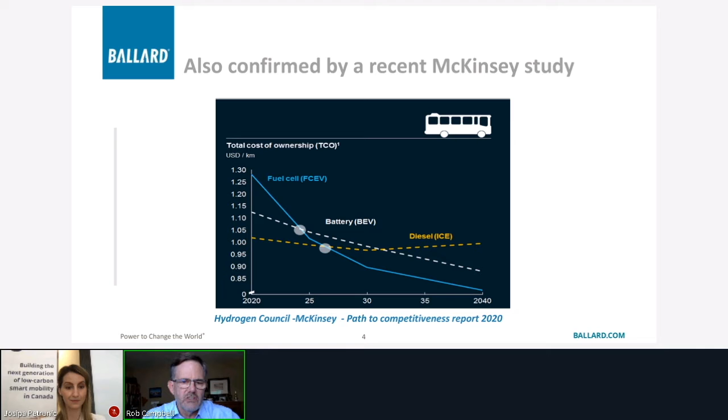But you may ask, how can this be the case? Well, this is all about the convergence of 6 key enabling factors that are making what we call the hydrogen economy truly transformative for our society going forward. So let's have a look at these factors. In brief, we have technology, the outcome of decades of work, as mentioned, with support from the Canadian government as well. And performance: millions of kilometers of road experience with feedback from customers, continuous improvement to ensure proven, robust, and reliable benefits.

Infrastructure: large fueling stations needed by public transit are more affordable and easier to adopt with hydrogen.

Industrialization: massive investments are now occurring worldwide to scale both fuel cells and hydrogen production. It seems this is almost a daily news update, with even billion-plus-dollar projects being announced, as recently the case with support in Germany and some major project activity in Australia.

Fuel: sustainable and affordable hydrogen can be produced from renewable energy, making it zero emission, which is very good news. And finally, the environment: we are working to ensure minimal carbon footprint, maximum recyclability, and maximum reuse of materials to give the best overall value proposition by moving towards hydrogen.

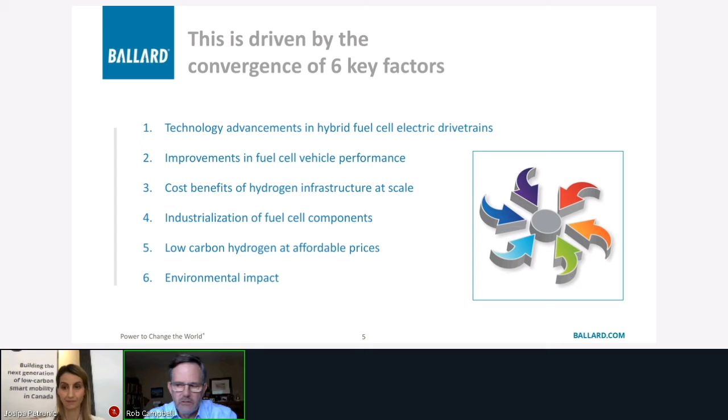Let's go deeper. First, let's touch on technology. At a high level, fuel cells are combined with batteries in the powertrain. They work together synergistically, with the battery providing instantaneous power and the fuel cell the overall energy needed in the form of electricity. Therefore, the overall electrification of the powertrain that has occurred over the last decade has brought forward all the complementary systems needed for the effective use of fuel cells.

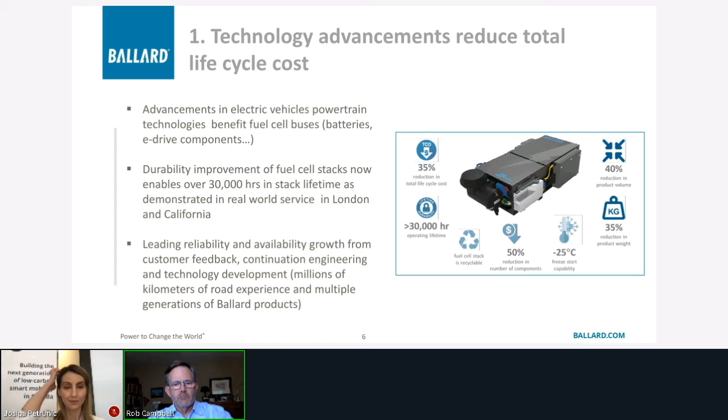Combine this with the parallel maturity of fuel cells, and we now have fuel cell buses being manufactured on 3 continents by multiple OEMs. We are on our way. And when it comes to performance, there are clear advantages with fuel cell buses.

Superior range: New Flyer announced that the buses delivered to Orange County in California have a full load range of 550 kilometers. We heard yesterday from Mr. Cliff Thorne of Orange County that fuel cell buses fully meet all of their operational needs.

And we look at fuel economy, especially in the Canadian context where we have our classic cold Canadian winters. The heating benefits of fuel cells really help increase the overall fuel efficiency, while at the same time, no compromise to passenger capacity due to the lower weight of the overall systems and rapid refueling, similar to the time taken for CNG. Operators can effectively treat these buses the same way they do today with their diesel-powered equivalents, a one-for-one equivalency to seamlessly integrate into existing operations.

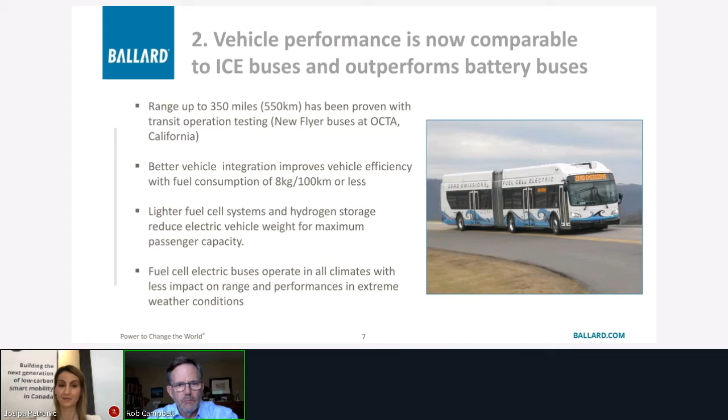When we talk about the need to move fast with zero emission, does this sound appealing? Absolutely. Now let's think holistically about the complete ecosystem and what's needed specifically around fueling.

This is all about the impact of refueling with hydrogen molecules, compared to charging with electrons through a variety of electrical charging systems. And hydrogen refueling is more cost effective as it scales.

This is one of the reasons we believe it's advantageous to deploy fuel cell technology at public transit, where you fuel in the depot and fuel larger fleets, typically more than 50 buses. This is the sweet spot for hydrogen infrastructure. If you look at the graph, it's roughly 50 to 100 buses.

There are clear advantages when we think of hydrogen. A variety of options exist to enable space-efficient integration of the fueling systems onto existing transit properties. To put in perspective, more fueling can be done by simply having more hydrogen storage on site or more frequent hydrogen deliveries, in comparison to having larger and larger charging capacity to accommodate larger fleets. Hydrogen can also increase resiliency in the event of power outages.

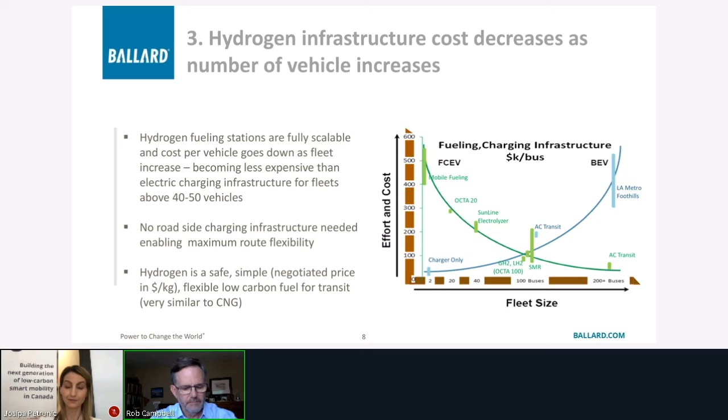Now we talk about industrialization. This is all about scaling our industry, and volume production is now underway with a highly energized supply chain. The impact is a massive 70% reduction in cost this decade, as forecast by McKinsey. We have also verified this forecast with our own internal analysis and ongoing cost reduction activities. This will tip the balance in favor of hydrogen as the solution of choice.

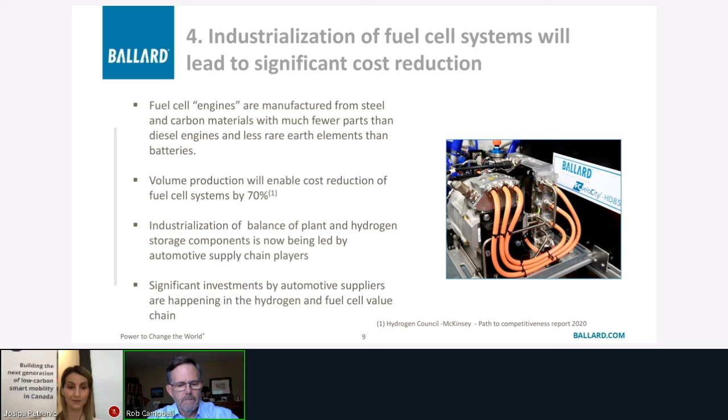I'd like to touch upon how we can tie this in with renewable energy and carbon capture to truly unlock the potential here in Canada. There's a larger benefit we need to consider of using hydrogen, and this is its ability to effectively couple both renewable energy and legacy energy assets in our economy. We call this sector coupling, and our vision is that hydrogen can be used in multiple sectors ranging from transportation to industry to commercial and residential heating, thereby enabling significant scaling of the hydrogen supply system.

Further, hydrogen can be used for cost-effective, large-scale energy storage. Why is this significant? Well, with cumulative demand across multiple sectors and cost-effective energy storage with hydrogen, we can embark on a huge long-term expansion of renewable energy generation that will ultimately allow us to keep our planet at a safe temperature. Canada already leads in hydropower, and a good example of that is Manitoba Hydro, which has 100% of its electricity produced by renewable energy. Let's put our strengths to work.

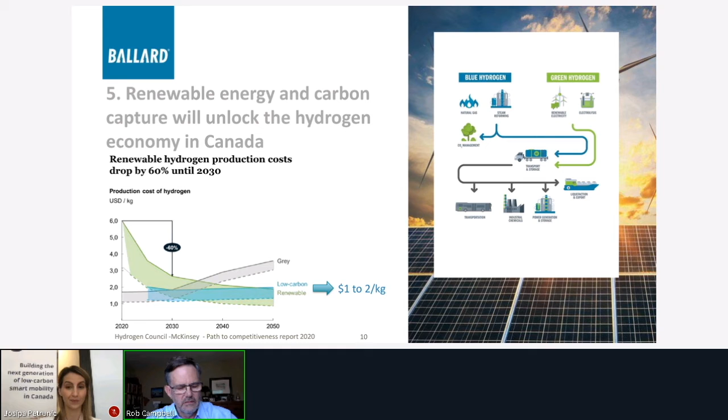Finally, when we look at emissions and greenhouse gases, fuel cells are truly attractive when it comes to sustainability, being some 75% superior in terms of cradle to gate greenhouse gas emissions, and also enabling very high recyclability within the platinum industry, which is the main catalyst within our product. The platinum industry is already geared to recycling. For example, we fully recycle all of our core membrane electrode assemblies, or MEAs, which is the basic cell or building block of the fuel cell stack. We also reuse all of our bipolar plates when we refurbish these stacks for reuse.

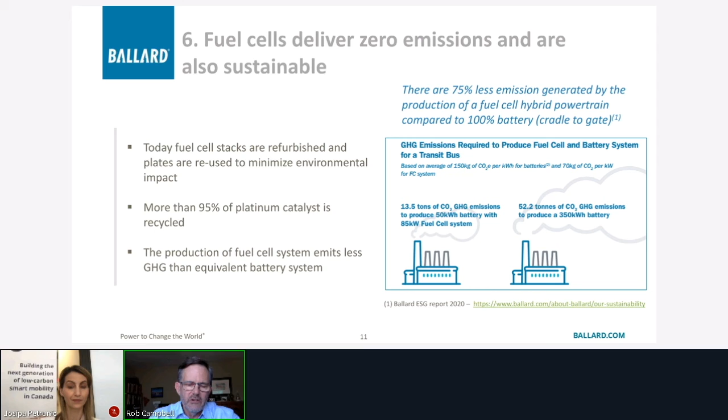Now you can see why I am so excited about fuel cell electric buses for all of us. The solution is proven, it's affordable, it's sustainable, and delivers to all of your transportation needs. Let us show you how we can do it. We're ready to help. Let's transform our industry to 100% zero emission this decade.